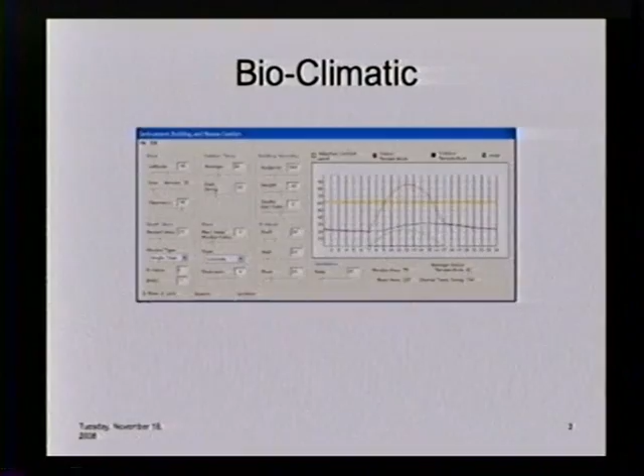So this is a bioclimatic zone in Chicago. You can see that energy efficiency doesn't only mean saving energy, but it also means having to maximize human comfort.

In January, which is probably the coldest winter month, the data is for around this area, which is the coldest and also has the highest humidity. If you see the chart here, it's divided into four parts. This part has high temperature but also high humidity. These two are different, and in this section, there's lower temperature but low humidity.

So, to show you how architecture design approach is different from engineering - usually the architect deals with this kind of thing more than the engineer. This kind of chart suggests how you can design, how you can fix things, how you can adjust - the building is like the fabric, like the coat. It can be adjusted, the body can be adjusted. So that's how we approach bioclimatic design.

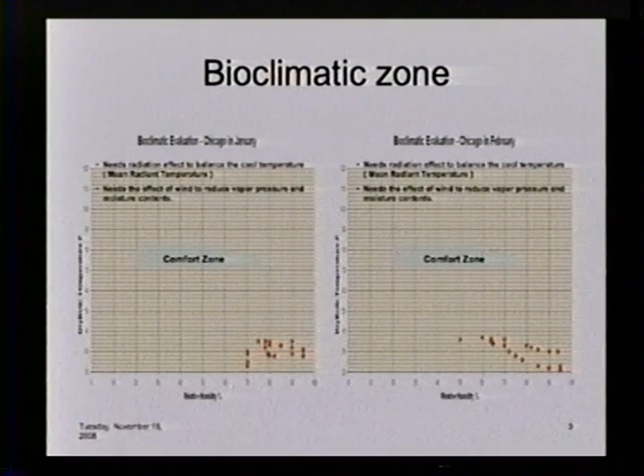If you can see, over a 12-month period, you can see it all starting and moving from the right to the left, starting from the bottom right corner and moving up to the top left. That's when the temperature is getting higher.

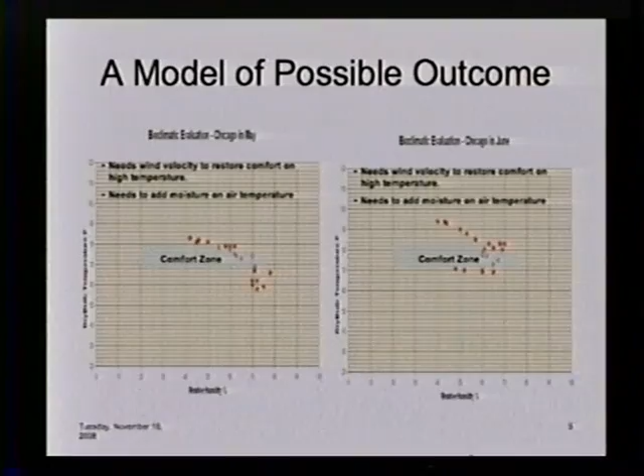But this one is in January, and this one is in May and June. You can see that they start moving toward the comfort zone. So anything that's not within the comfort zone means it has to be adjusted.

So now we know how to solve the problem, by finding many means. For example, if it's too cold, we can provide radiation. If it's too hot, then we have to provide some cooling, which can be passive cooling or mechanical cooling. If the humidity is too high, we have to provide some wind, enough ventilation to reduce the discomfort from the moisture content.

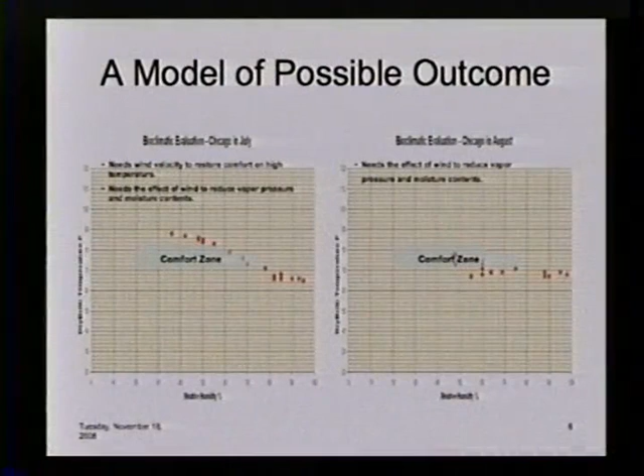So you see that it's starting, and then it comes back again, because the climate in this part of the country is divided into winter, then summer, then winter again. So the curve kind of goes in a curvature, kind of symmetrical.

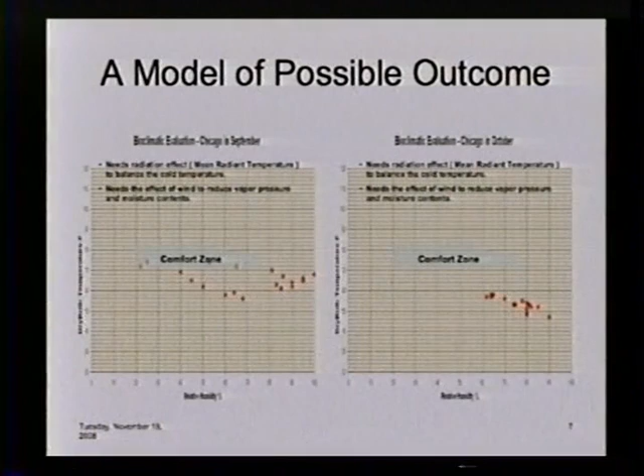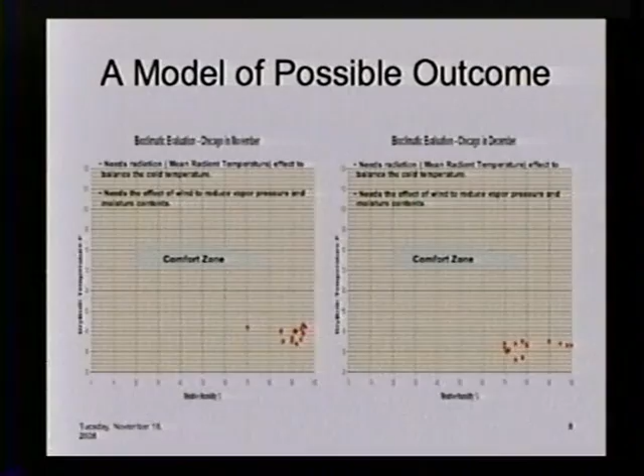The mean radiant temperature means, suppose we are in this room. Right now the outside temperature is cold, but I'm staying here, and I receive heat from the heater, along the fin tube, which provides heat to me. So I feel warm, but because the outside temperature is cold, the cold and the warm kind of reach an arbitrary line between the heat and the cold. That's called mean temperature. So it can be, right now, between 75 degrees and maybe outside 50 degrees, and they match each other at the mean.

Another thing I'd like to introduce - has anybody heard about this before? It's called sol-air. In order to provide human comfort, solar radiation is one of the most important things, and the other is air temperature. That's also important. So the methodology we did is to combine these two together. It's called integrated sol-air.

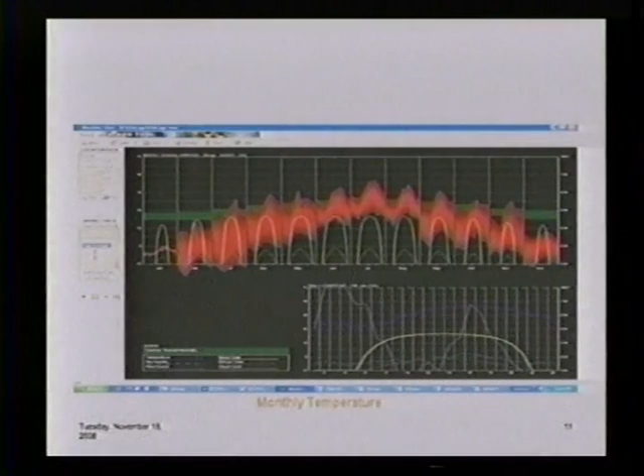So these are the temperatures, an hourly temperature, but for the entire month, and the curve is very similar.

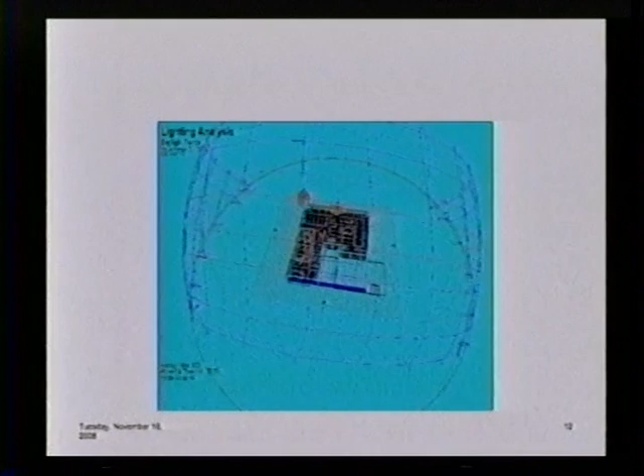On this line, it tells you about the altitude, the height of the solar position, and it also has a graph here where you can plot this and find out what the daylight factor is according to the solar radiation.

And this is the azimuth, the angle within the horizontal plane. And this is the altitude, which is the vertical plane.

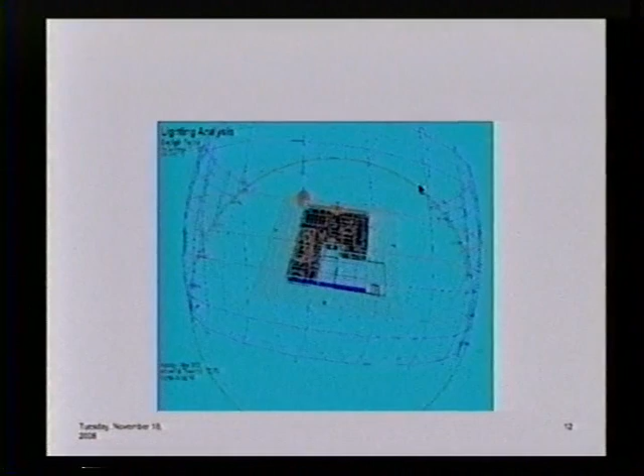Okay, so this is just an introduction. Next thing I want to talk about is the building information model, and in the energy simulation there are categories, step by step. The first one is the climate or weather data, which I have introduced to you, and the second thing is the building and the model.

The model represents the building. So we can say that because the building hasn't been built yet or hasn't been solved yet, we cannot say that the building has been touched by us. So we have to say that we represent, we can abstract our work.

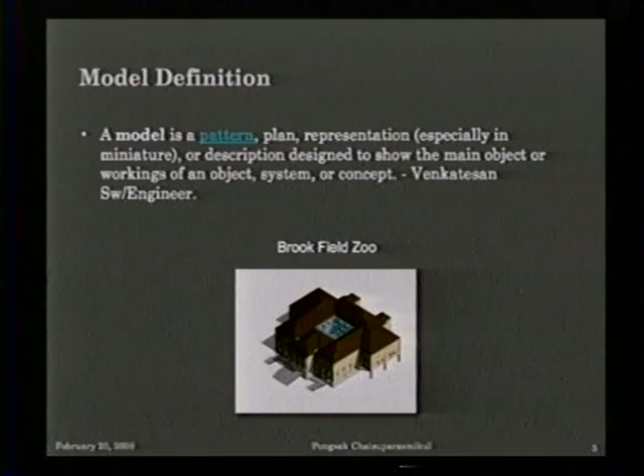So another reason BIM can be very successful nowadays is because of the object-oriented system. Before, the reason we didn't have BIM is because there was no object-oriented system. It's just been created recently, probably 10 years ago.

And the character of the object-oriented building system is very nice. One is an integrated building design solution, especially for AEC - architecture, engineering, and construction. This is very important, and it makes me very interested in the integrated design solution because of this.

And the second thing is it contains model phenomena. And the third thing is it can represent the object as an object - like it can tell that this is an object, this is a verb, this is a noun, this is a plural.

And in order to achieve the object-oriented system, you have to classify what is an object, what is a method, what is a system, and what is an event. And it also contains data abstraction.

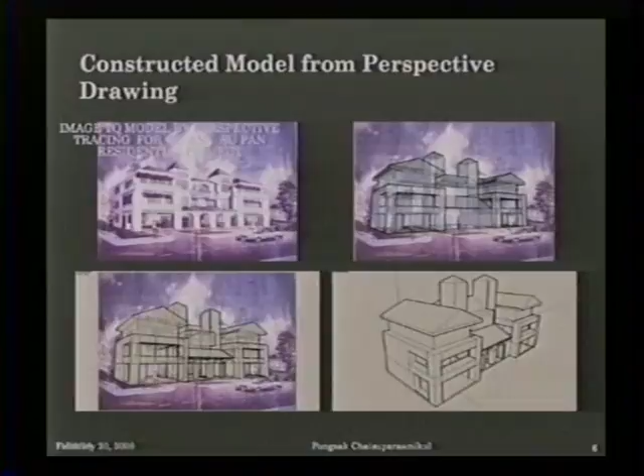So this is a definition. All this is very important, marked as green. It tells about the definition and the concept of the model, and it's very important to our field, because architecture and engineering have to deal with something virtual—the design before it comes up.

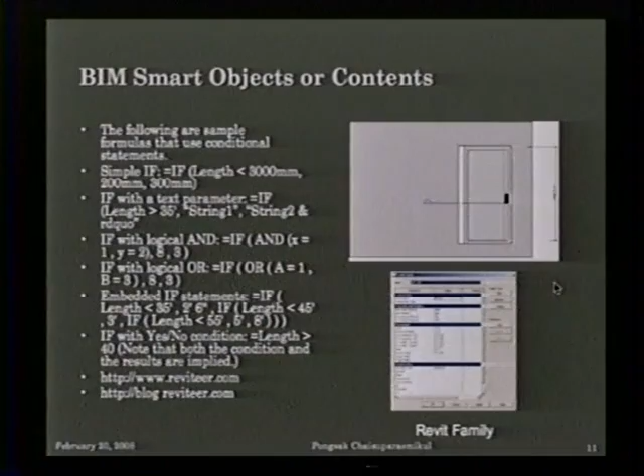This is a sample of the script that tells you about this door. It says that if the length is less than 3 meters of the wall, the door does that; but if the length is greater, whatever, do that instead. So this is exactly the same as building code.

So if you can write a script like this and propose it to the building code, you don't have to spend time trying to collect every single word. You just run the script and you get the whole support, and then you can provide it to the city with the building code.

And I guarantee you every single sheet of your drawing—because before, suppose it's 100 or 1,000 sheets, you had to go through every single sheet. But now with this system, you can run it without having to worry whether all the 1,000 or 100 sheets comply with the building code or not. This is very powerful.

Another important concept is coordination and collaboration. You can call import-export part of collaboration, also sharing. Without data sharing or without coordination, you cannot achieve interoperability.

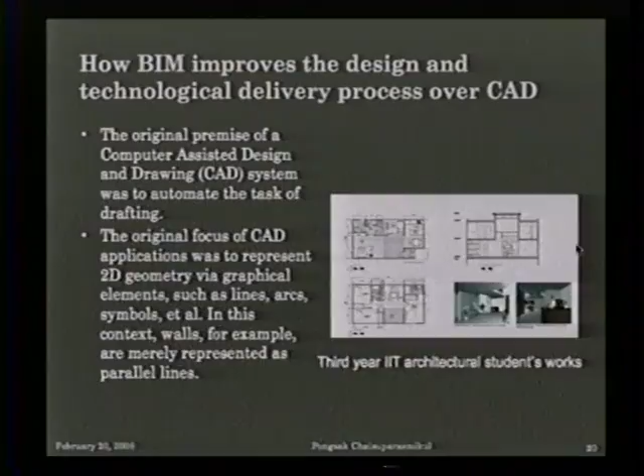So to establish some meaning behind graphical elements, the concept of layers and blocks was introduced. That's why you see that all CAD software has layers and blocks - because of the elements. If you want to move an element, you'd get 1,000 elements, which is very inconvenient. That's why they had to group it as a block or layer.

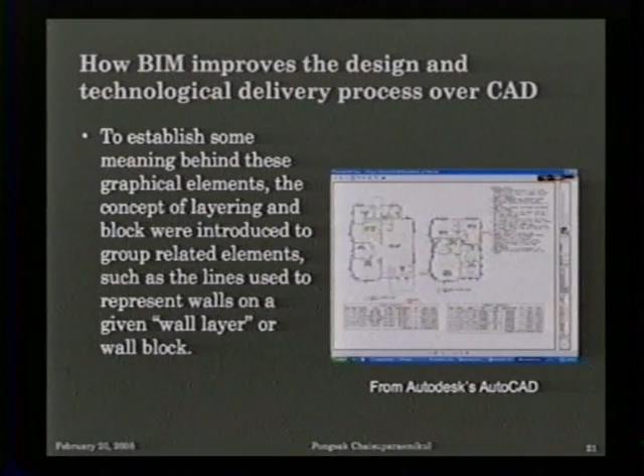And from 2D, they started to make it more complex by causing relationships between elements and it became 3D. But this 3D is not BIM - you know why? It's a 3D now, from 2D it becomes this - this is a real 3D too, but it's not BIM because, you know why?

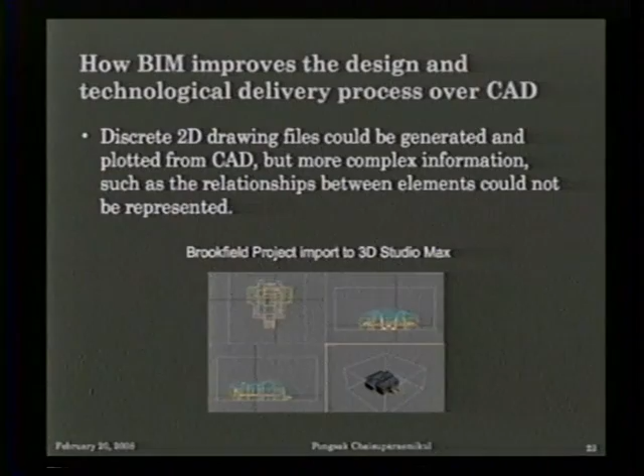Exactly, because it has no information inside. You cannot extract any information. All you get is a graphic, but some data inside there, nobody knows what's happened.

So now there's another called a fusion of 3D CAD plus parametric. Now it has more data because the parametric is data. And now it creates well-coordinated, repositionable geometry in support of visualization - not only visualization, now we have more capability than just visualization.

And now it even makes visualization even better than before. Like when I try rendering the BIM, it has more meaning than before, even though it's the same graphic visualization. But by having data inside, it's amazing - it has more, like it has a mind inside.

So this was done by somebody - not me - who created this Architectural Desktop object model. But architecture desktop is not BIM, though it has something similar to BIM, but it's not really BIM. At that time they called it ADT.

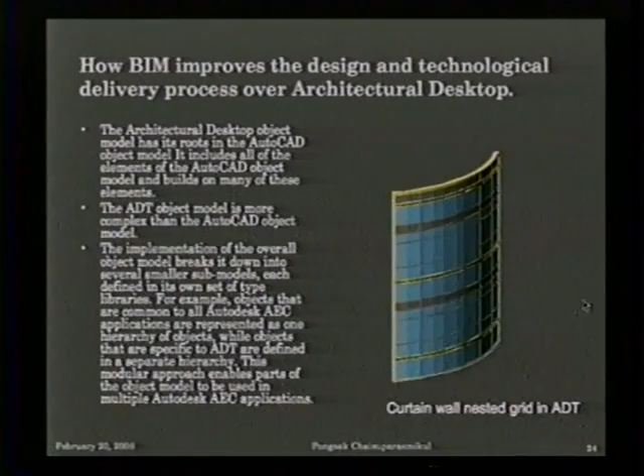When I transform it to the BIM model and then render this - amazing, it's a lot better than before. And it can even change too, it can update itself. I don't have to render again - when I change some information, it can update itself.

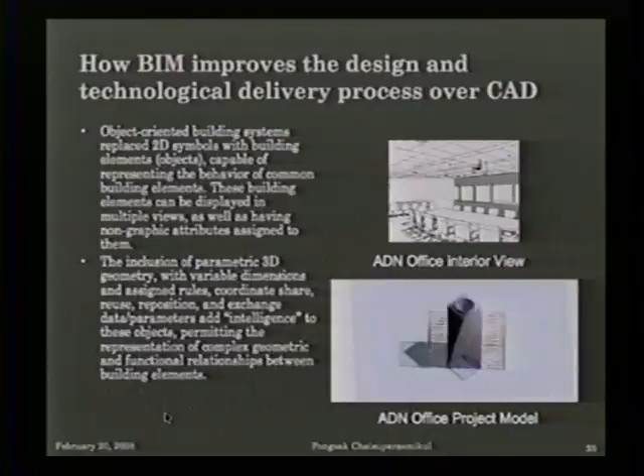For example, if I put the material for this curtain wall and render it one time, then next time I change the curtain wall into something else, some window or whatever, it changes by itself - I don't have to redo it again.

It's an ADN office. At that time it was important to the project because we want to sell to our client that we want to make an interior, because the client wants to know that if they change the light bulb from incandescent to fluorescent or whatever, or to an exotic light, what the mood or feel of the space is going to be. That's why it's useful and able to support and make our client happy.

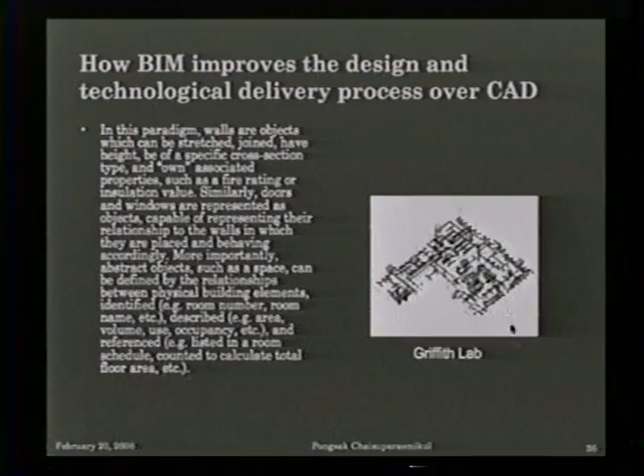This project is also a lab project, Griffith Lab, and this is interesting too because on the rooftop there's seven mechanical equipment rooftop units that provide cooling to the space below. The lab is one story high, and they put all these rooftop units on the roof, and beneath the rooftop they have a hole that the duct can fit through.

With BIM it's so amazing, because when you attach something, it attaches, and it won't come out. If you see some drawings, there's a problem with the core, where equipment falls down and crosses the line with the architecture - they call that a clash, architecture and engineering clash. But because you have BIM, now everybody is happy, no problem.

And this project is about trying to find the optimization form or shape of this building.

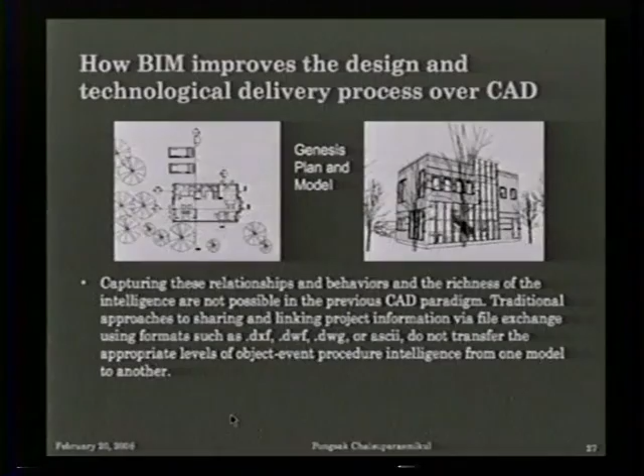This is in Chicago. There's a question - the answer is that optimization means you have to minimize the heat gain in the summertime and maximize the heat gain in the winter, minimize the heat loss in the winter, in order to achieve optimization of the shape and form of the building. So if you run the energy simulation and find out the optimization point, then you can know the shape and form of the building.

So this is another benefit.